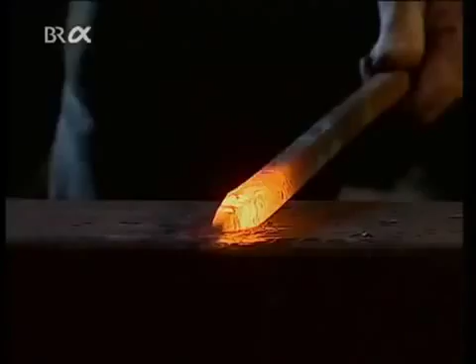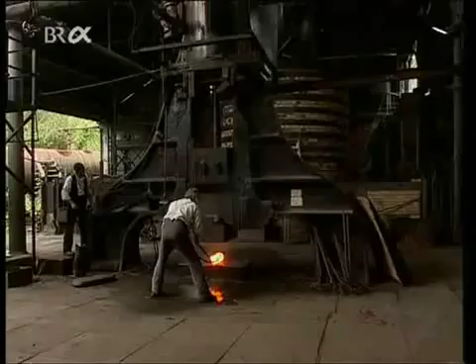For centuries, whenever work had to be done, man was dependent on sheer muscle power. Later, with the help of water wheels and windmills, he was able to utilize the power of the elements, but only to a limited extent. It was not until the early 18th century that a new solution presented itself to those who wished to be independent of the weather and geographical factors. That solution was the steam engine.

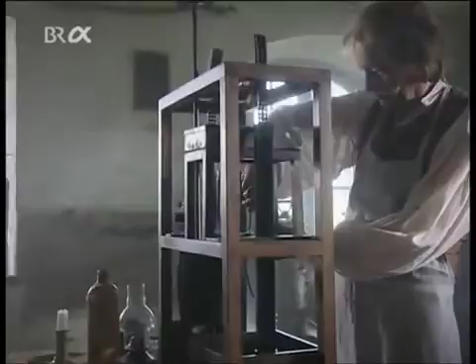One name stands for its success story, that of James Watt. This Scottish engineer didn't invent the steam engine, but he vastly improved the original concept.

In 1775, Watt and his partner, Matthew Boulton, set up a factory in Soho, today a part of Birmingham, which manufactured modern steam engines for delivery to industrial centres all over Europe.

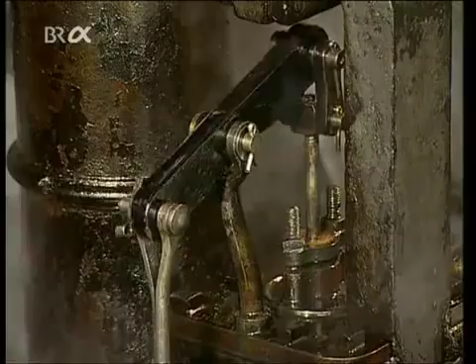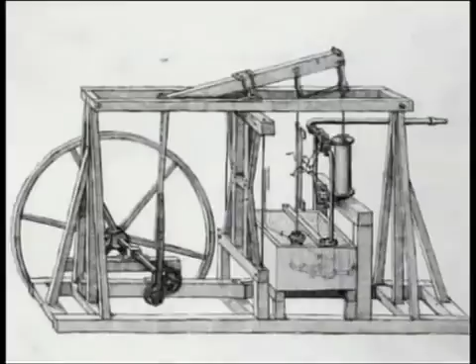Visitors asked Watt himself about all the latest technical developments, but he wouldn't reveal any details. Indeed, he kept his knowledge a closely guarded secret. Any visitor who made too many sketches, like German engineer Georg Friedrich von Reichenbach, was seen as a spy and quickly shown the door. Watt had acquired his expertise at great effort over many years.

James Watt was born in Greenock, near Glasgow, in 1736. His father was a ship's chandler who had his own small workshop. From time to time, he also repaired nautical instruments. James spent a lot of time in his father's workshop, watching him at work.

At the age of 18, he started an apprenticeship as a precision engineer in Glasgow, which he completed in London. James learned how to manufacture scientific instruments, and in doing so, provided proof of his talents.

In 1756, Watt returned to Glasgow. Since the length of his training did not meet the requirements of the craftsmen's guilds, he was not permitted to set up his own workshop.

However, Glasgow University required his services. And in 1757, it allowed him to open up a small instrument-making business on its premises.

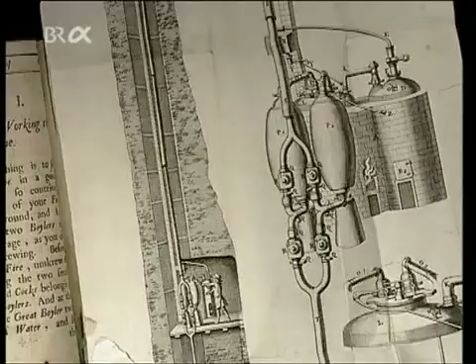This was a real stroke of good fortune for Watt, since staff at the university imparted modern technical knowledge and engaged in research. Its scientists were particularly interested in the steam engine. It enabled heat to be converted into mechanical energy.

In 1712, a blacksmith and inventor called Thomas Newcomen had built a practical steam engine. It was designed to improve the efficiency of water pumps in mines so that galleries could be driven further underground.

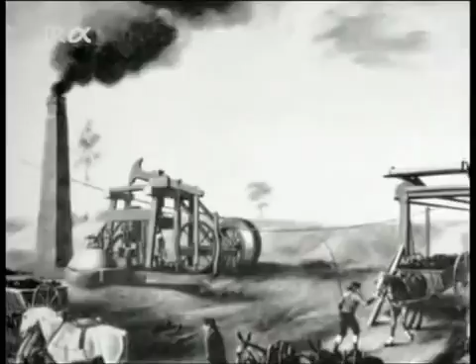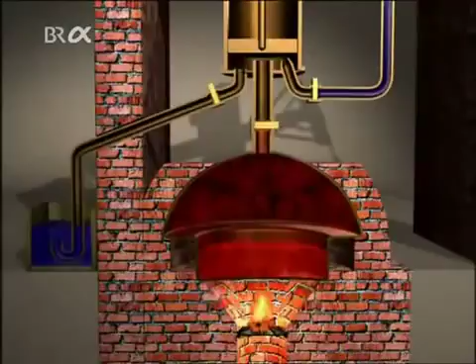With Newcomen's invention, water is made to vaporize in a boiler. The steam is fed into a cylinder. The pressure from the steam and the weight of the pump rods on the other side of the beam slowly force a piston in the cylinder upwards.

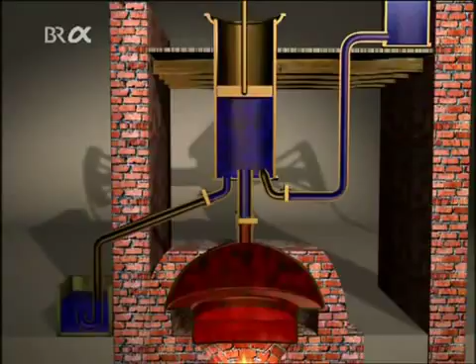The steam supply is now cut off and cold water sprayed into the cylinder. The steam condenses and its volume decreases abruptly. This creates negative pressure in the cylinder and, because of the atmospheric pressure acting from above, the piston moves back down into its original position. The water that is collected in the cylinder is drawn off and the process starts again.

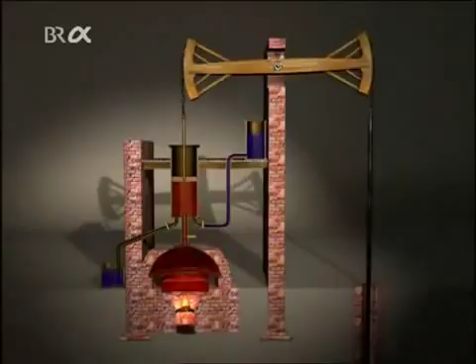For many years, steam engines were used primarily for operating pumps. Newcomen's success was also revealed by the fact that a model of his machine was used at Glasgow University for explaining how steam engines worked. But the model didn't always function as well as intended. When it came to an unexpected stop yet again, it ended up on Watt's workbench for repair.

James Watt began to examine a machine that was totally new to him. He discovered that the principle was not very economical, because when the cylinder fills with steam, it gets very hot, and when condensation takes place, the cylinder cools down considerably. With each working cycle, the cylinder first has to be heated up again, so a large amount of the steam supply is wasted.

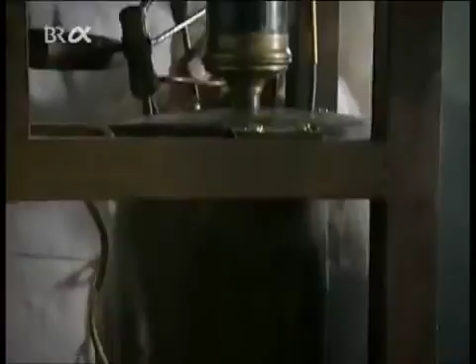Is it really necessary, Watt thought, for the cylinder to cool again? Surely leaving it hot would be much more efficient, but in that case, how could the steam be condensed? Watt then had the brilliant idea of using two separate cylinders.

At the start of his process, the piston is at the bottom of the cylinder. When steam is introduced under the piston, this subjects it to pressure. As with Newcomen's machine, the pressure from the steam and the weight of the pump rods force the piston upwards.

Now the steam supply is cut off and a pipe leading into the second cylinder, the condenser, is opened. In this case too, the cooling of the steam creates negative pressure, which, together with the atmospheric pressure, forces the piston back down. The pipe connecting the cylinder with the condenser is then closed off again and the steam valve opened. The process can now be repeated without the steam cylinder having to cool down.

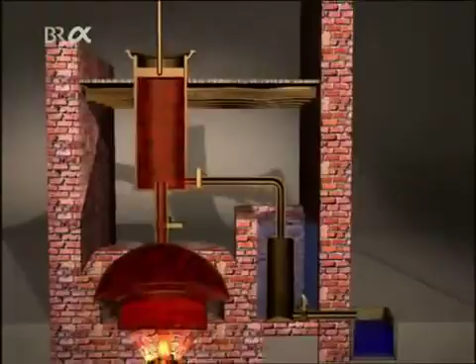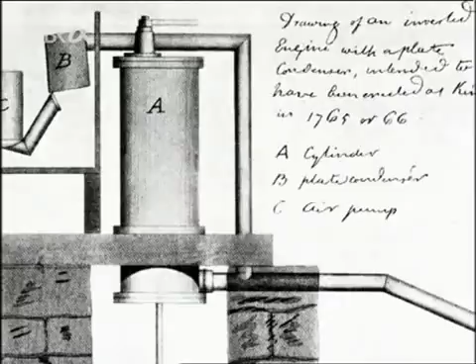In 1769, Watt had his improvements patented, but in order to build a practical steam engine, he needed a lot of money. He found a financier in John Roebuck, a mine owner. In return for his support, Roebuck claimed a 2/3 share in Watt's patent.

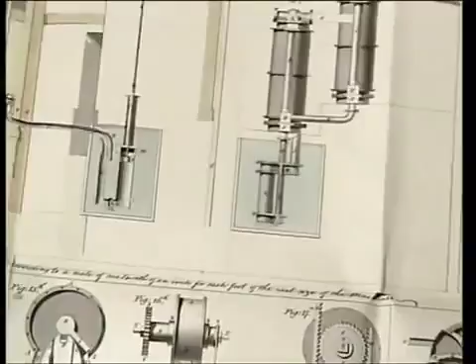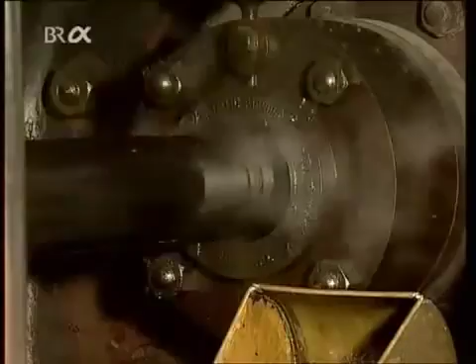But 4 years later, Roebuck went bankrupt. He sold his patent rights to a wealthy manufacturer from Birmingham, Matthew Boulton. Boulton immediately recognised the importance of Watt's steam engine. Shortly afterwards, he and Watt founded the world's first factory for manufacturing steam engines, Boulton and Watt.

Only a year later, production got underway. Meanwhile, Watt was already working on further improvements. His aim was to boost the efficiency of the steam engine so that it could be used for other tasks beside operating pumps. He achieved this with his double-acting steam engine.

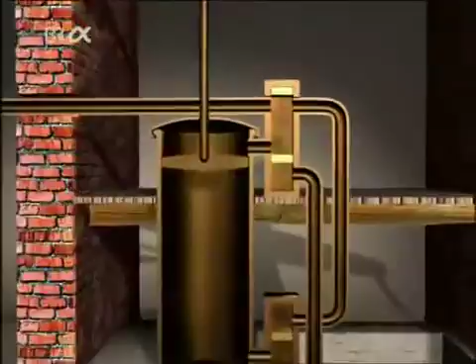First of all, steam flows into the cylinder and forces the piston downwards. Watt's idea was that when the piston is at the bottom of its stroke, steam pressure could also be used to force it back up. To achieve this, the steam supply is cut off at the top and opened up at the bottom of the cylinder. Steam now flows into the cylinder from below and forces the piston back up.

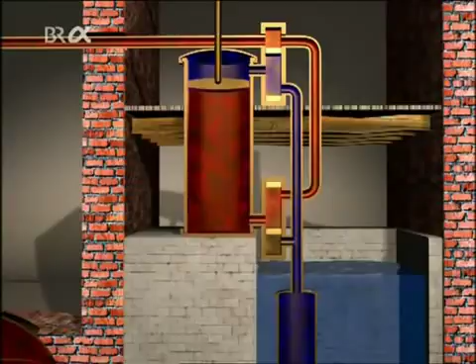And to prevent steam at the top from impeding the upward movement, the steam supply there is cut off and the connection to the condenser opened. When the piston is at the top of its stroke, the process begins again. The steam supply is opened at the top of the cylinder and shut off at the bottom. At the same time, the connection to the condenser for the superfluous steam is opened.

With this technique, Watt was able to utilise both piston movements, upwards and downwards, to achieve a vast improvement in efficiency.

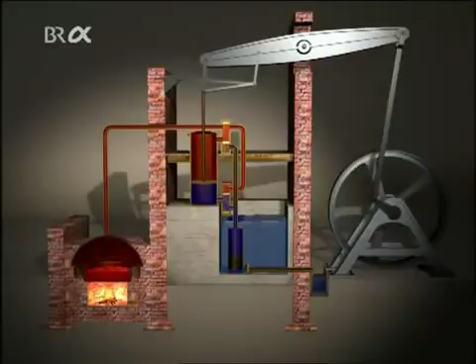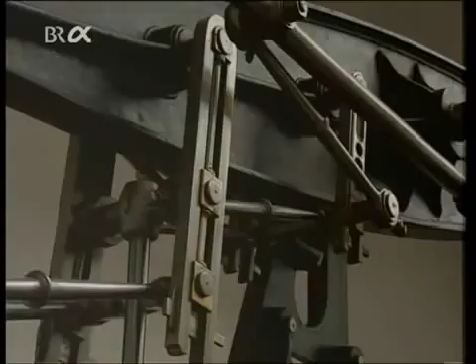The double-acting steam engine was also suitable for converting the up and down motion of the piston into rotary movement. So instead of just pumping water out of mines, the steam engine could also be used to drive other machines as a substitute for wind and water wheels. To achieve this, Watt invented a special transfer mechanism, a planetary gearing.

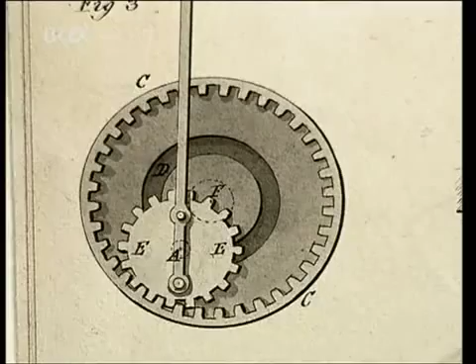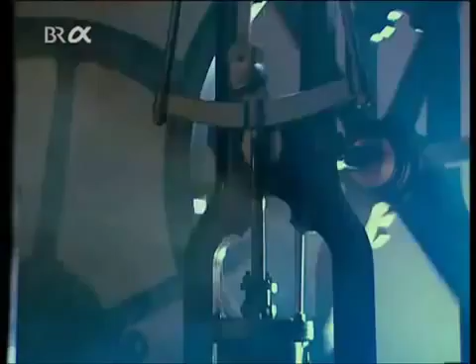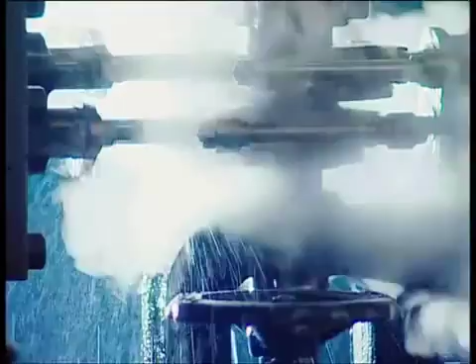In addition, uniform rotary movement is attained by means of a large, heavy flywheel. But one major problem remained. If several looms in a mill were operated simultaneously, the heavy load caused the speed of the steam engine to fluctuate considerably. To correct this, the steam supply had to be regulated by hand.

But in 1788, Watt solved the problem. He developed an automatic speed control, the centrifugal or flyball governor.

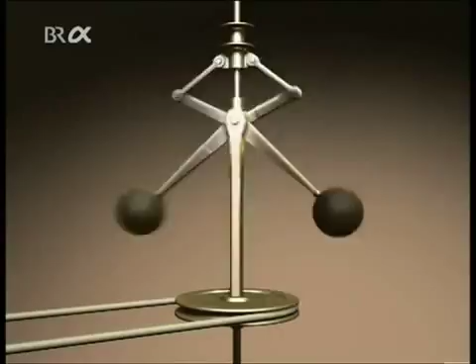If the speed of the steam engine increases, centrifugal force causes two rotating masses to move outwards. This motion is transferred to a throttle valve, which reduces the steam supply from the boiler to the cylinder, so the machine again runs at its original speed. Conversely, if the steam engine is running more slowly than normal, the throttle valve opens to raise its speed. It's an automatic control system.

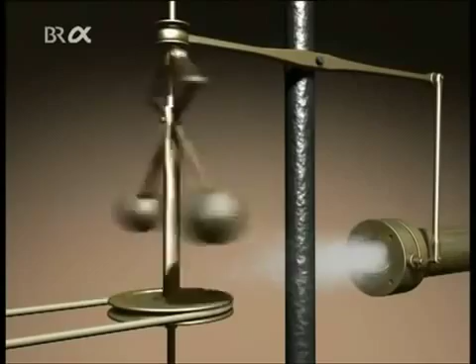In order to describe the advantages of his rotary steam engine in a better way, Watt introduced a measure for its output: horsepower. The work done by horses had been used for this purpose at an early date, but Watt made the comparison more precise.

In 1782, he calculated the size of a steam engine for a sawmill. He'd obtained data on the performance of the horses used in it from the miller. On the basis of this, Watt determined that 1 horsepower was the amount of work needed to raise a mass of 75 kilograms 1 meter in 1 second.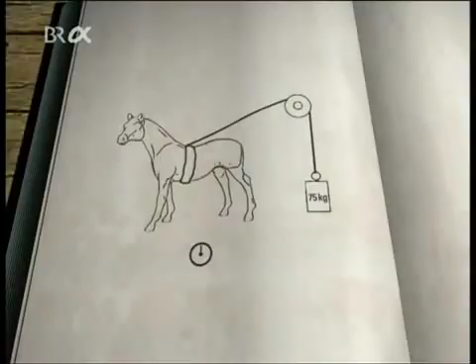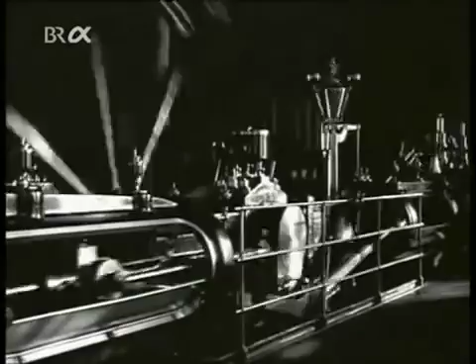Through their improvements, Boulton and Watt enabled the steam engine to achieve a breakthrough. Now, it wasn't just mine operators who wanted the new type of steam engine, but also the owners of paper and cotton mills.

A few years later, James Watt was a wealthy man. Patent revenues to the tune of more than £76,000 swelled his bank account. And his achievements were soon recognised by Britain's social elite. In 1785, James Watt, a man who had never studied, was made a Fellow of the Venerable Royal Society of London.

Watt's steam engine was successful, but the limits of its performance capacity had not been reached. However, Watt's patent rights prevented other engineers from developing steam engine technology any further. They had to wait until 1800, when his patents expired.

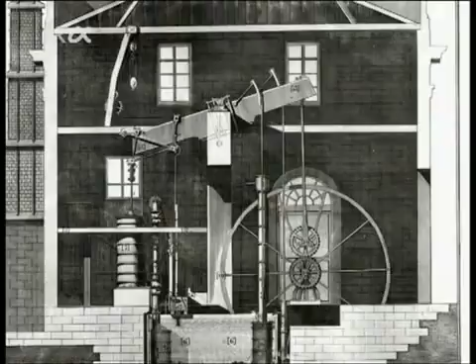One step which Watt had always declined to take was the use of higher pressure in his steam engines. But this enabled the construction of smaller and even more efficient machines, which opened up new areas of application.

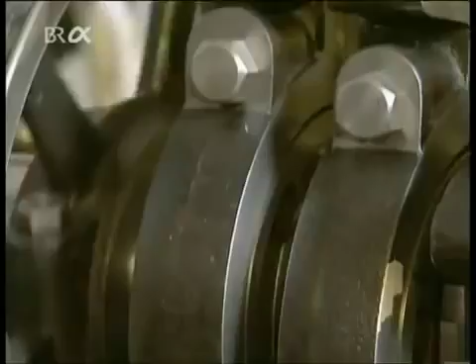In 1804, Richard Trevithick built a steam engine that could travel on rails. George Stephenson used the concept in designing his locomotive, the Rocket, which in 1829 won a speed and endurance contest near Liverpool. In addition to the railways, it was above all large steamships which used the new engines.

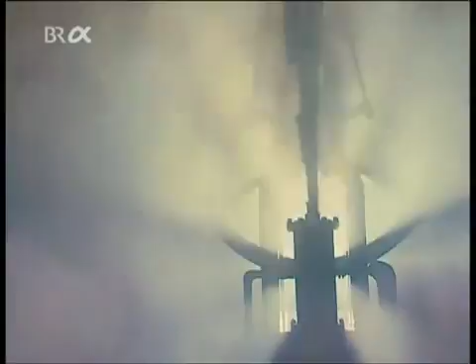James Watt died in Heathfield near Birmingham on August the 25th, 1819. Nearly 200 years on, the man whose developments launched the modern industrial era is still very much present in our everyday lives. Not only in the horsepower unit, which he introduced, but also in the watt and the kilowatt, units which have replaced horsepower as a means, for example, of indicating the output of a car engine.